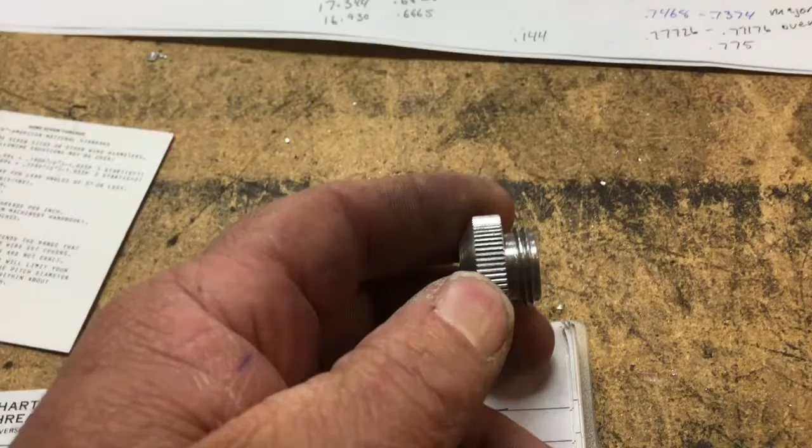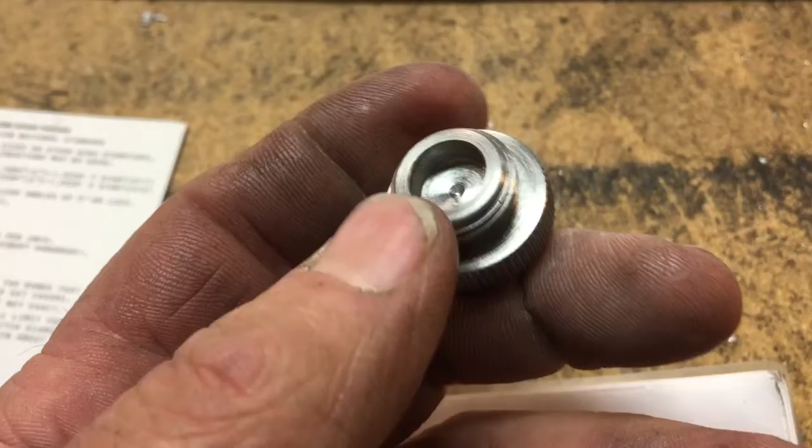Okay, so here is the new version of the Black Diamond receiver cap. One thing I screwed up on, I'm going to make a little bushing for it. That hole's supposed to be 377 where the spring goes, and I grabbed a 7/16 end mill accidentally. I don't think it's going to make any difference, but I'm going to make a little press-in bushing just in case the recipient wants to put that in there.

He can put it in and tap it in with a soft mallet, or press it in with a drill press or something like that. A little super glue on it and just press it in. I don't think it's going to make any difference.

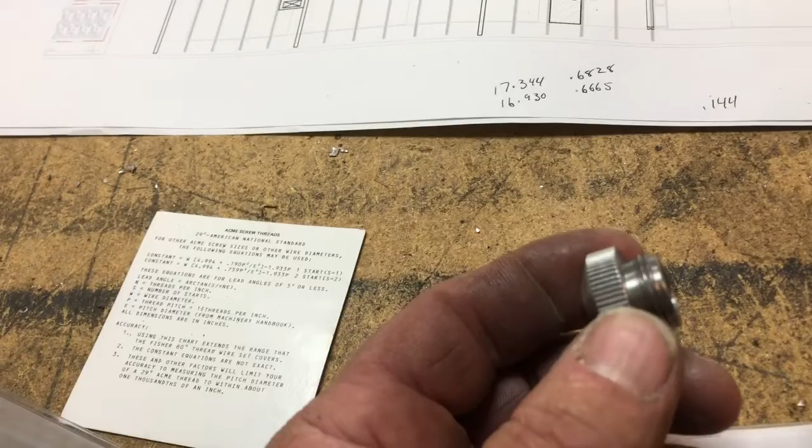The original plug, the measurements I got were 3/4 by 16 thread. I believe the actual thread is an M19 by 1.5, because when I sent the other plug out, or the other cap, he said it went in about a turn or so and then wouldn't go in all the way.

So I'm guessing the M1.5 pitch on the thread and a standard 16 pitch are pretty close to the same thread. They look quite a bit alike. They just don't fit. So anyway, here's the M19 by 1.5.

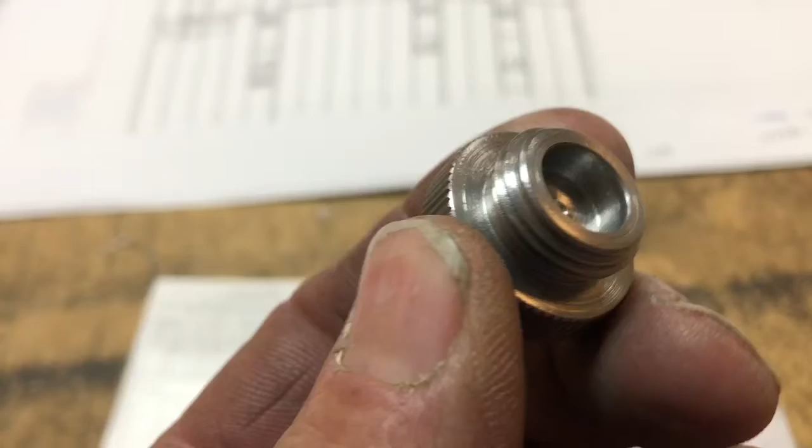There's the hole I bored too big, 7/16 instead of 2 thousandths over 3/8. So I'll make that little bushing 206 thousandths long to fit down into there. So if it's a problem, he can press that bushing in there.

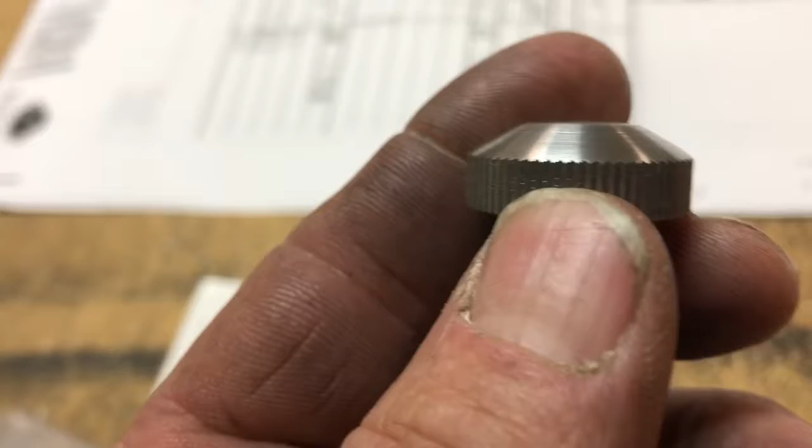I increased the angle on the original plug, the original cap. It was 15 degrees. I increased that to 30. I think that looks a little nicer, a little more taper to it. So anyway,

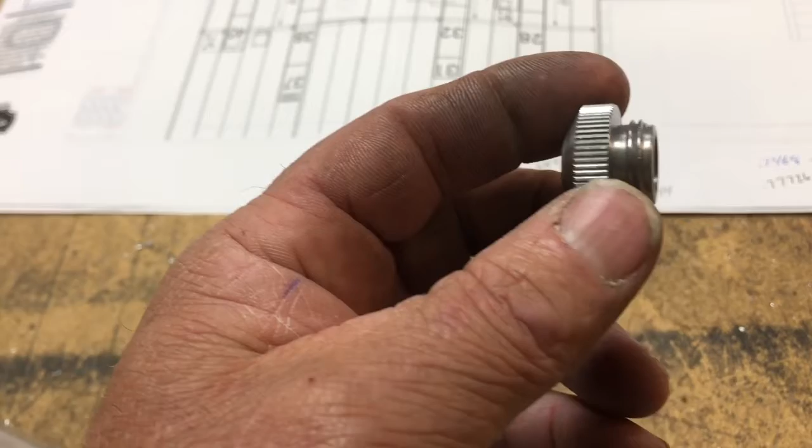Culp 1, there you go, buddy. Hopefully that fits. I'm going to send it off to you probably in a day or two once I get the little bushing made for you. We'll go ahead and send it out. So anyway, there you go.

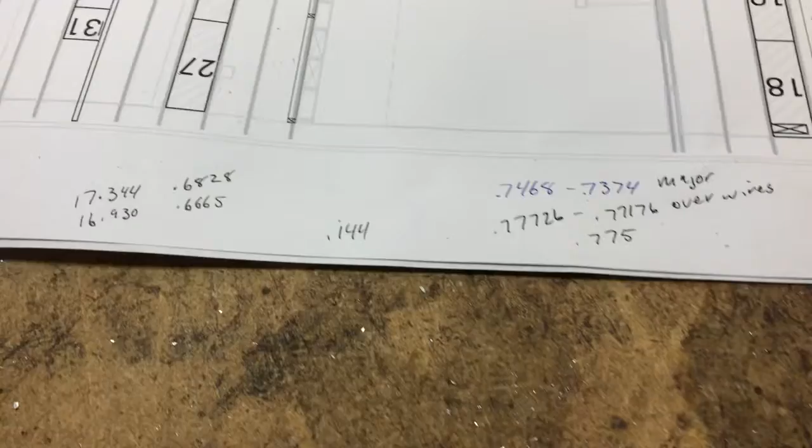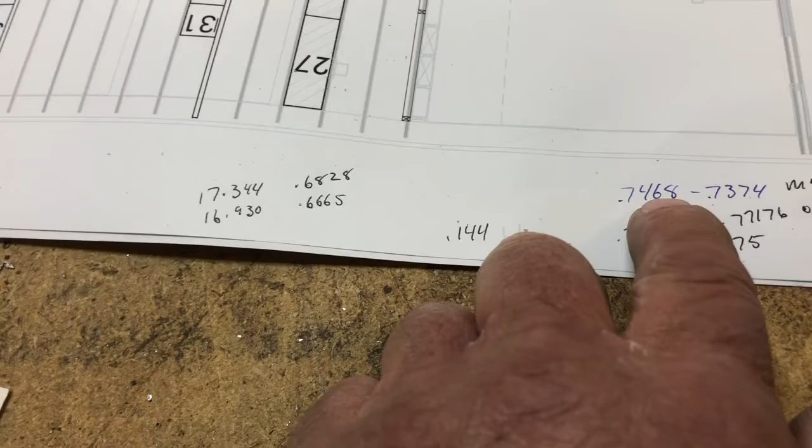One thing I wanted to add, so I converted all the metric, major diameter. When Michigan Muzzy measured his, it was 18.85 millimeters, and I didn't write down what that converted to, but I pulled it up on my thread calculator, and I got 0.7468. I did the conversions over from metric to inches, and 0.7374 major diameter. I'm just a couple of tenths under the 7468 when I turned down the first diameter on the cap.

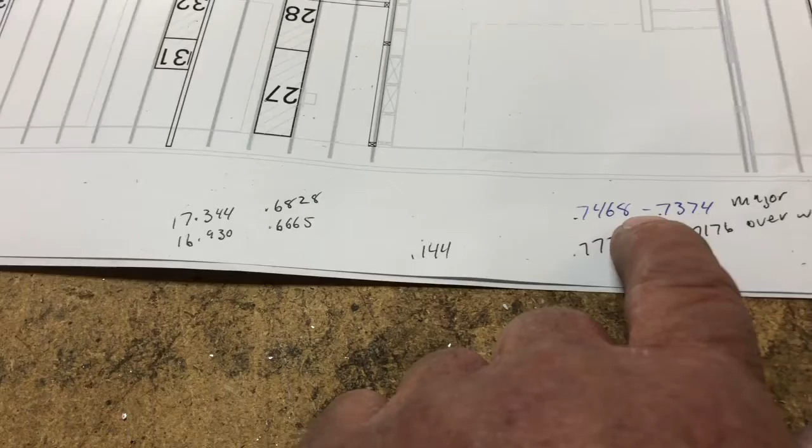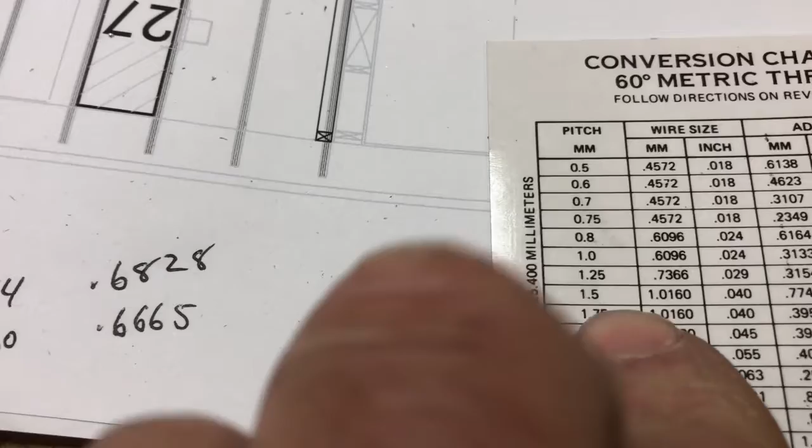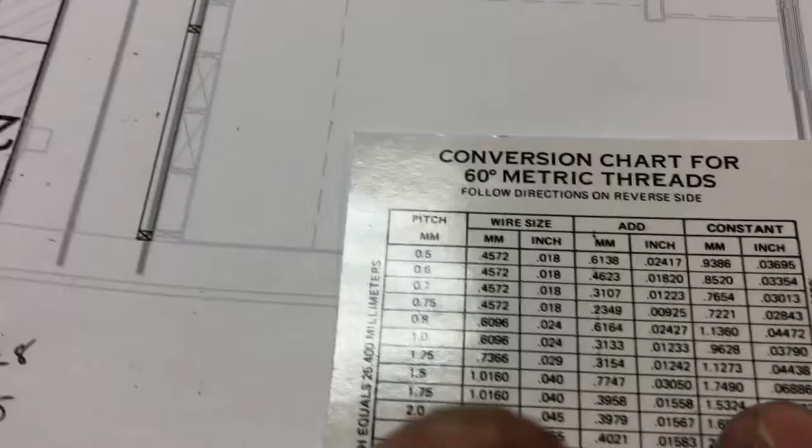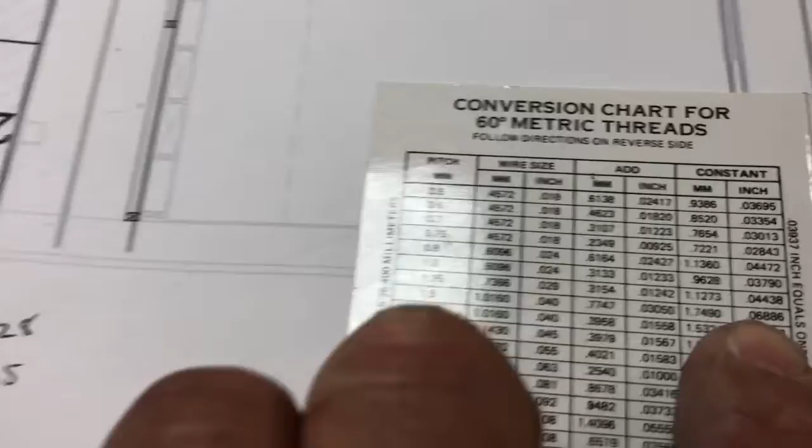And then my dimension over the wires, doing the calculations off my wire chart here, metric threads, 1.5 pitch, shows to use the wire size 40 thousandths. And then we add the constant, or subtract the constant from the dimension you get over the wires. There's more math in that, it's not really you add and then you subtract, but

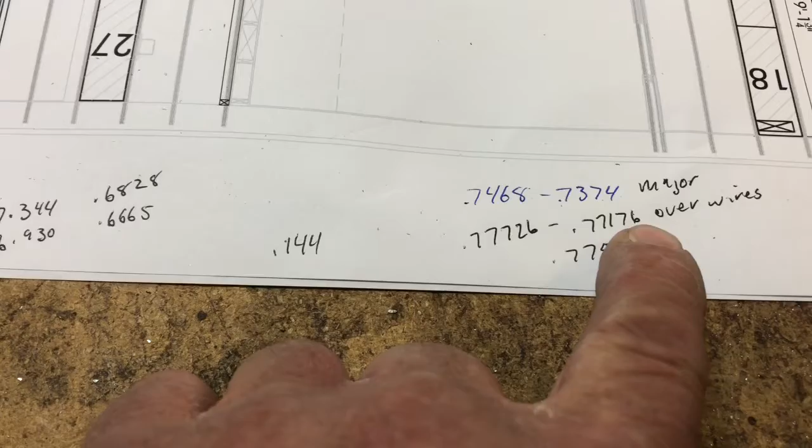anyway, the dimensions ended up 77726 to 77176 would make that thread be in spec. And I came out at 775 right on the nose. So I'm 2 thousandths under max diameter and about 3.3 thousandths above minimum diameter. So I'm kind of right there in the middle, so it should fit real nice if it is indeed an M19 thread.

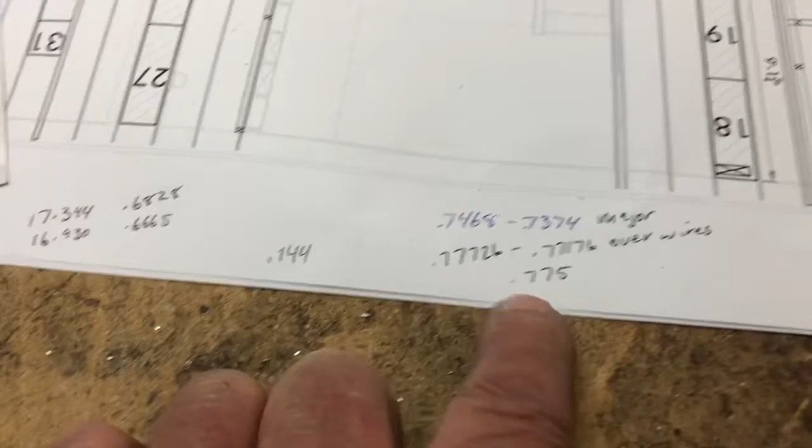So anyway, we're gonna drop it in the mail here in a couple of days once I get the little bushing made, and hopefully it fits. So Culp One, let us know how it fits. Send us a picture or send me a message and let me know if I screwed it up again.